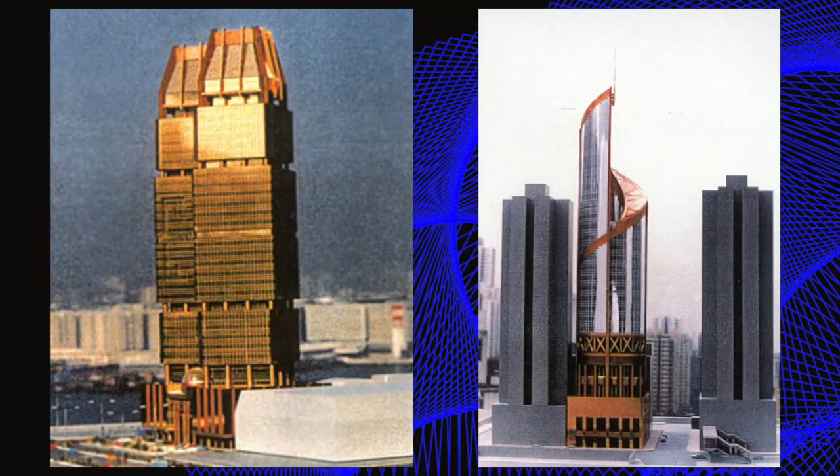Cosmont Design Group is an Australian-based company, integrating architectural design, urban planning, landscape design, interior design, and architectural construction supervision. It has completed many outstanding projects successfully over the course of its 35-year history in Australia, China, and other countries.

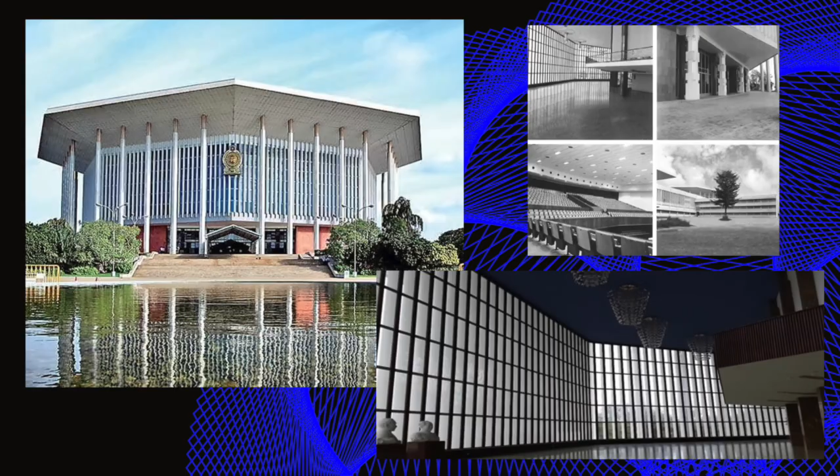The Bandaranaike Memorial International Conference Hall in Colombo, Sri Lanka, and the award-winning Islamabad Sports City in Pakistan, which used a mere 4 columns to support the vast span of the entire building, a revolutionary approach at the time.

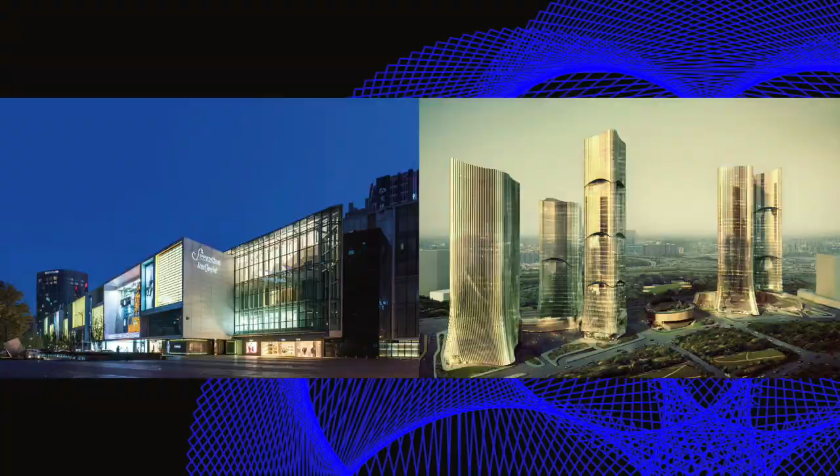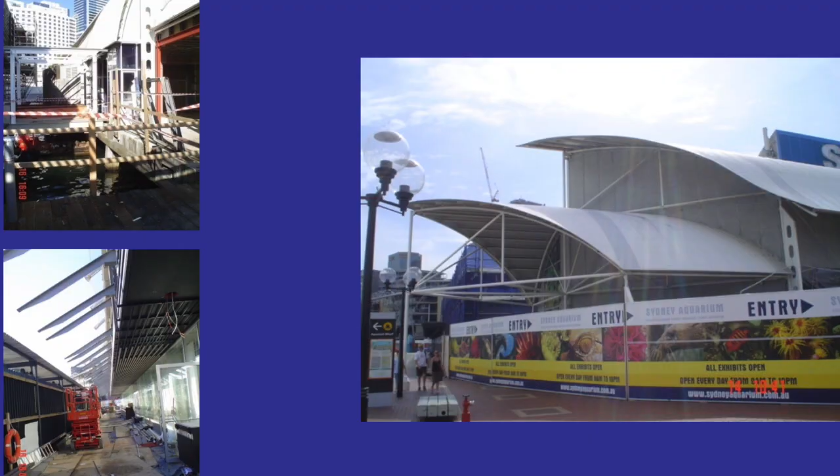The group's notable projects include designs for the Beach Plaza Shopping Centre in New York, the China Garden Hotel in Bangkok, Thailand, and participation in the design and supervision of the Sea Life Sydney Aquarium and Wildlife Sydney Zoo, alongside numerous residential projects.

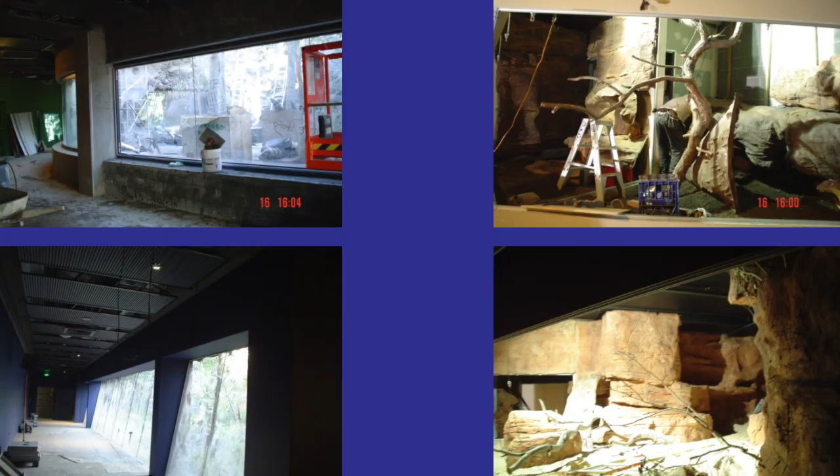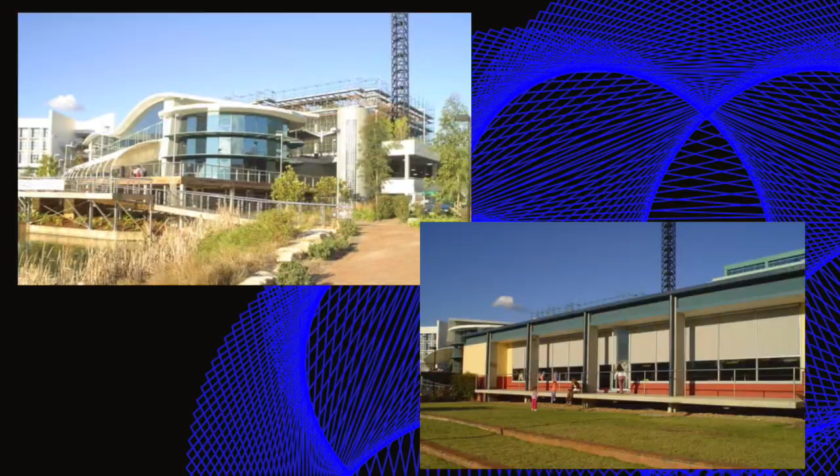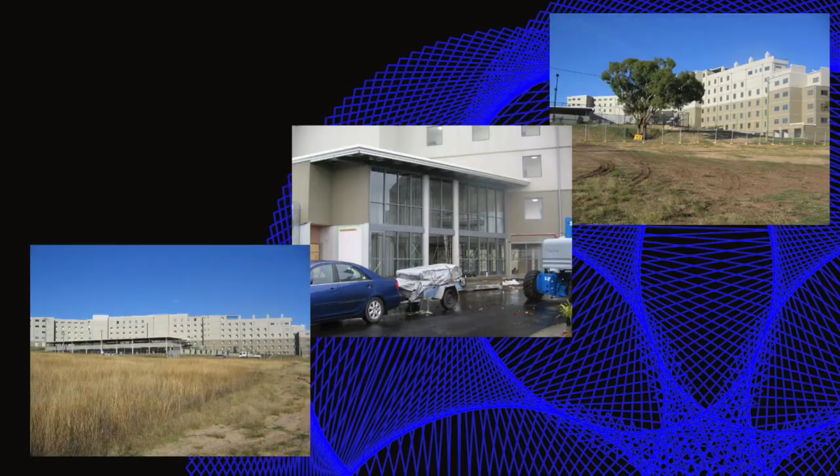In the present day, Cosmont Design Group continues on the path of developing an architectural style that merges Eastern and Western cultures for the Australian market. Their portfolio encompasses commercial, civil, and industrial buildings, all of which showcase their imaginative and innovative approach to architectural design.

Their attention to human scale and functional considerations is evident in their ability to integrate each building seamlessly into its environment.

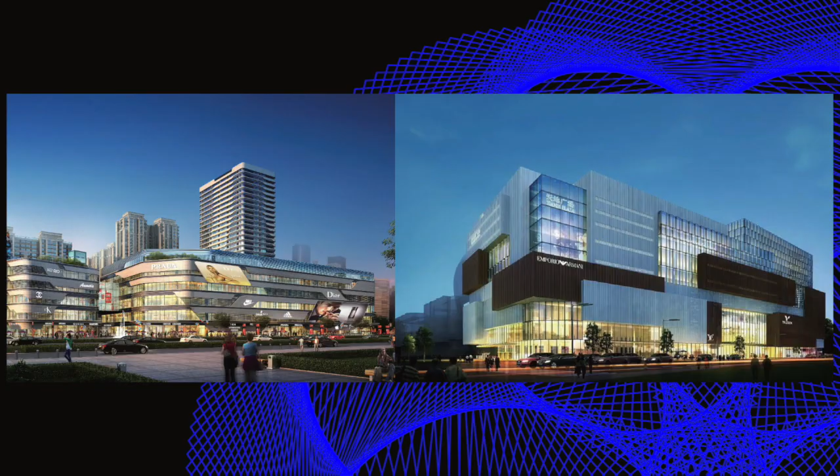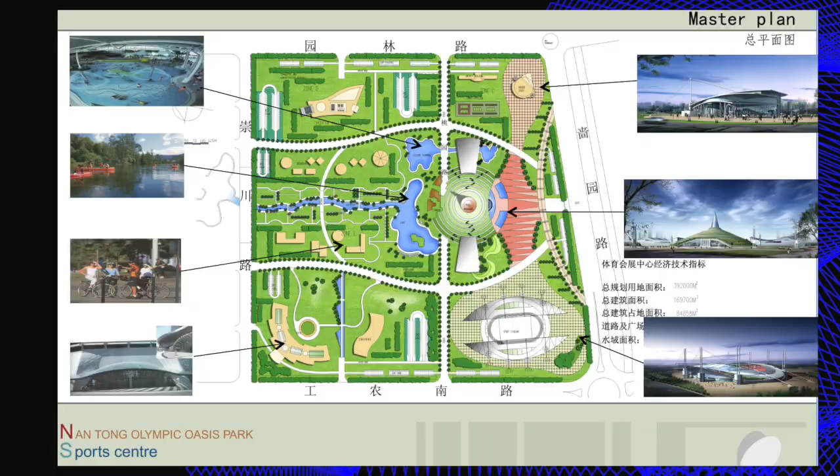Mr. B. Daishinjero, the director of Cosmont, has won many design competition awards, such as the China Theatre Design Competition, later published in the Chinese Architectural Journal, and the Best Preliminary Design for the Nantong Olympic Sports Center, which in 2004 was published by China Literature Publishing as one of the best architectural designs of that year.

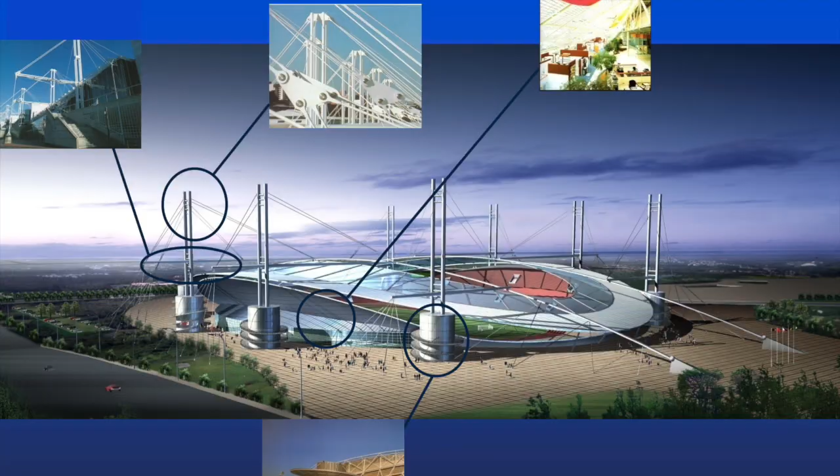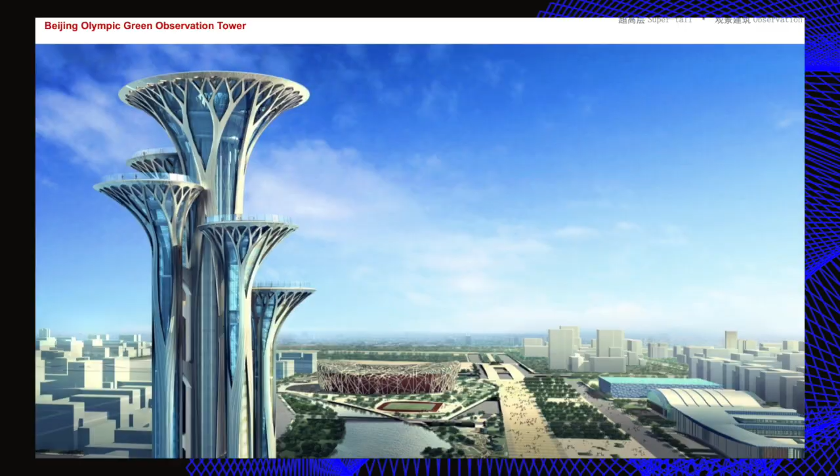Concurrently, he held leadership and collaborative roles in several commercial and civil construction undertakings in New Zealand and Australia. These included the conceptualization of a hotel development zone in northern Queensland, as well as numerous civil residential designs.

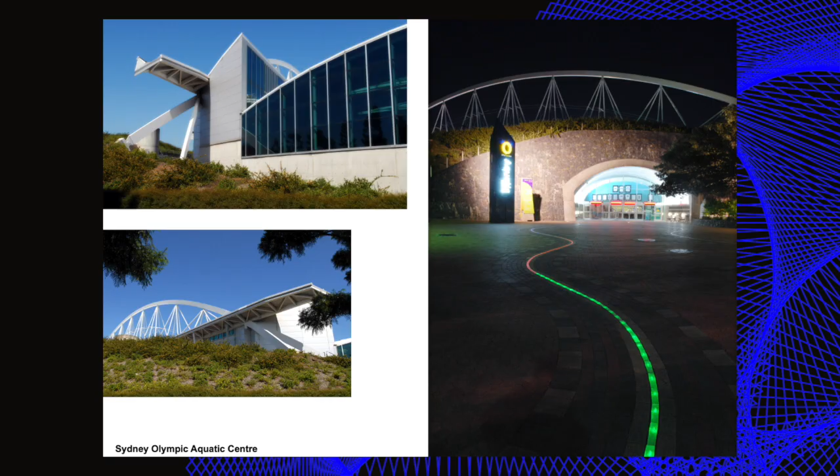Cosmont Modular Design Group also took part in the designs for the Sydney 2000 Olympic Games Aquatic Centre, as well as designs for some projects for the ABC.

Cosmont Design Group is also well versed in the area of construction management. The Fuzhou Yuanhong City project, comprising a commercial, office, and residential building complex of approximately 400,000 square meters, was funded by Salim Group, administered and partially supervised by Cosmont, and erected by the French SAE Engineering Company. Cosmont additionally designed some interior shop layouts for the project.

Cosmont Modular Design Group also designed and oversaw the building of several New South Wales government-funded swimming pools, the Volkswagen headquarters in Sydney, and one of the members also site supervised the interior construction of the Hilton Hotel.

Thus, Cosmont is skilled not only in Chinese design and construction, but also in Western architectural practices and project management.

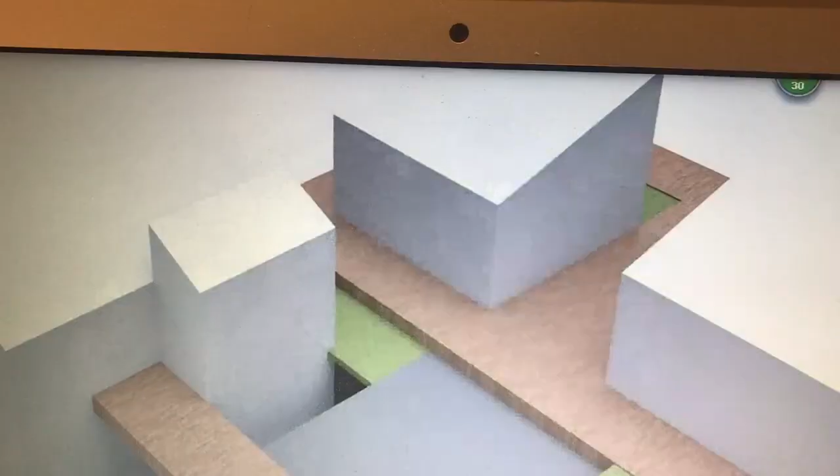In the early 1990s, BEAD began to incorporate the architectural design of the combined modular system in response to the construction industry's needs and to expedite the construction period, with the intention of replacing traditional construction methods.

BEAD's concepts were based on modular furniture design in his student days, revolving around the concept of using a sole base module to achieve infinite and flexible combinations.

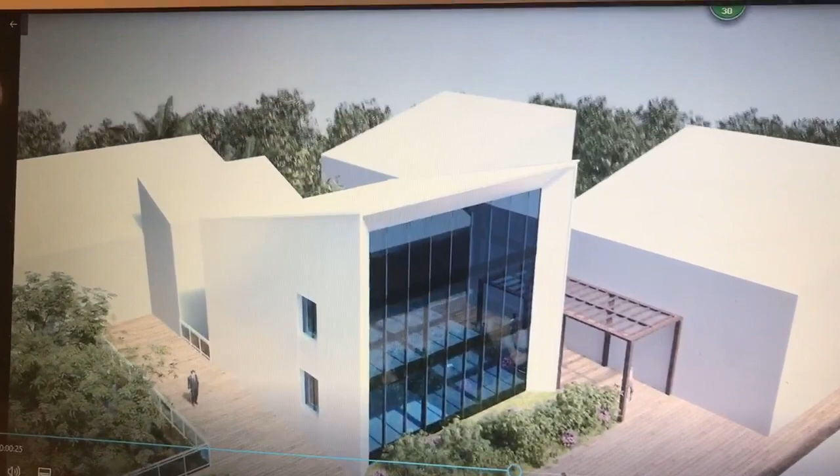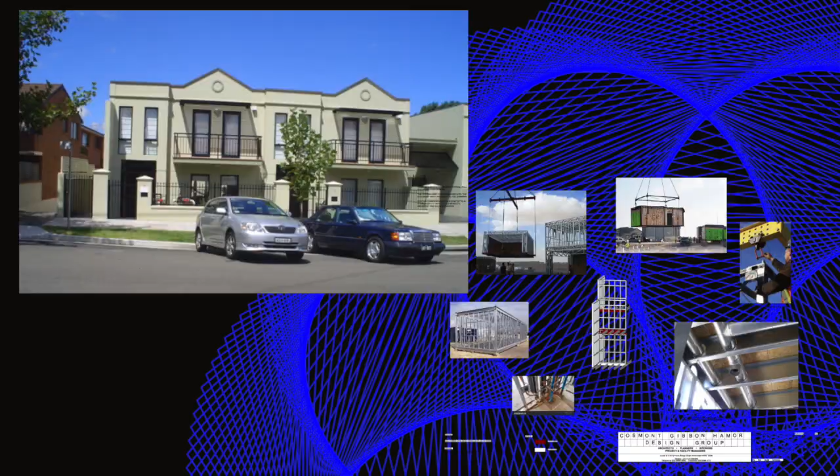In 2011, a collaboration between a New South Wales-based developer and Cosmont led to the construction of a 12-story residential building which employed modular design for its hundreds of kitchens and bathrooms, resulting in a significant reduction in construction time.

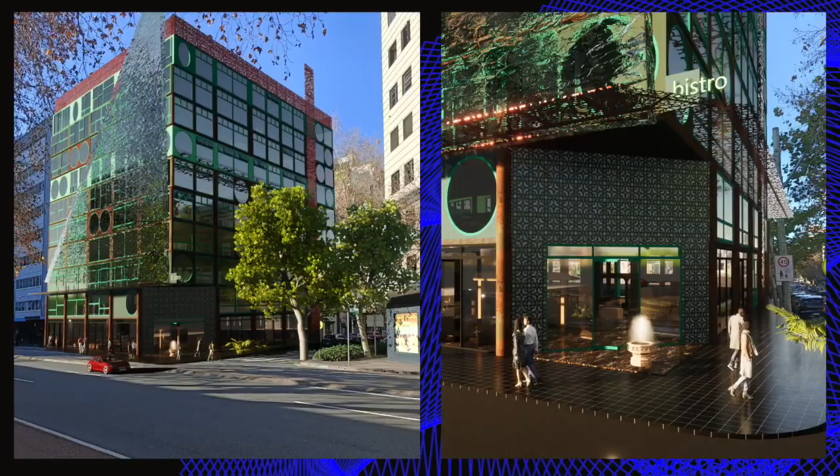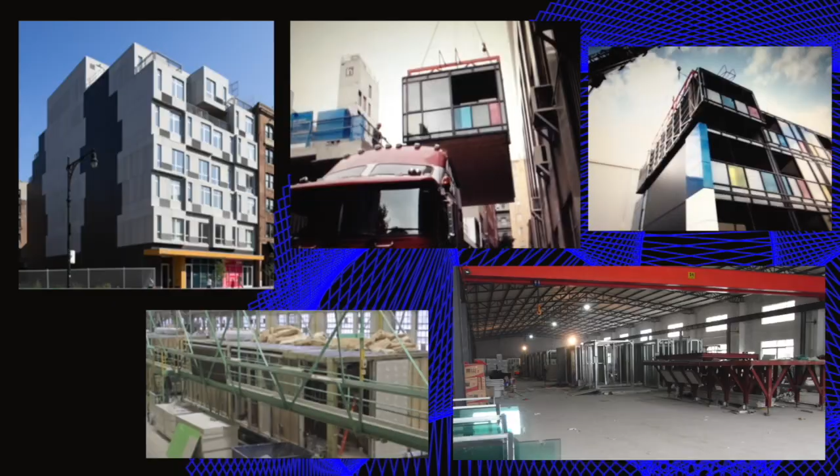In order to make modular buildings economically competitive, international cooperation is necessary. China, with its comprehensive production and processing capabilities, is uniquely positioned to swiftly produce modular building systems. This advantage, coupled with the complementary strengths of other nations, can result in excellent outcomes when China serves as a processing base.

Whilst modular design has been around in the Australian industry for several decades, it is only recently that excitement around the potential to mass manufacture buildings, and in particular homes, has increased.

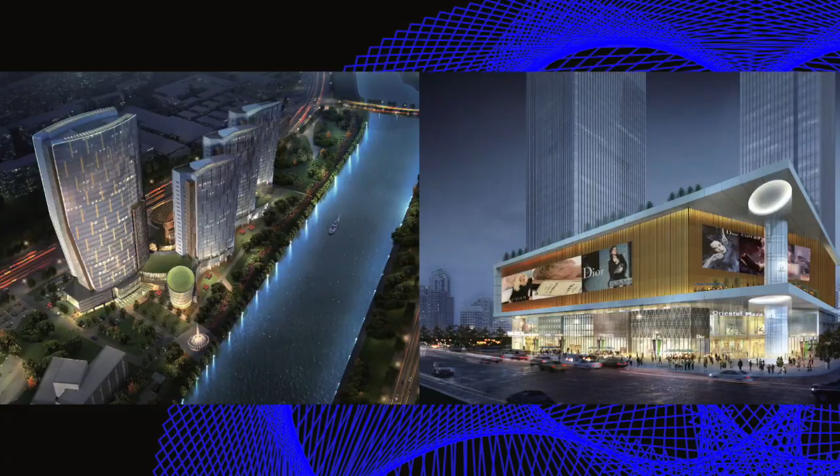Largely as the country's population has steadily grown, as the housing market has begun to bite, as the build-to-rent market has risen, and as the construction sector begins to feel the effects of a severe skills shortage.

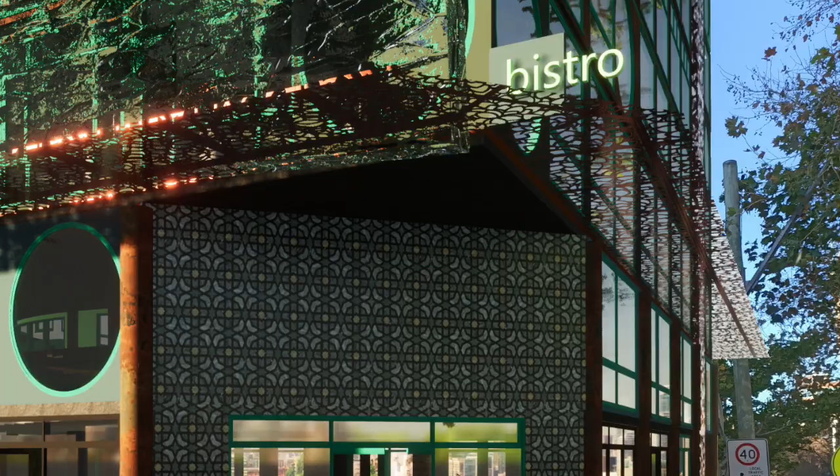In this video and on our website, we provide a glimpse of Cosmont's architectural designs through pictures of our works, showcasing our expertise. This proposed design for 240 Elizabeth Street in Surry Hills, Sydney, not only incorporates a modular system for the office building, but also integrates an automated car park system.

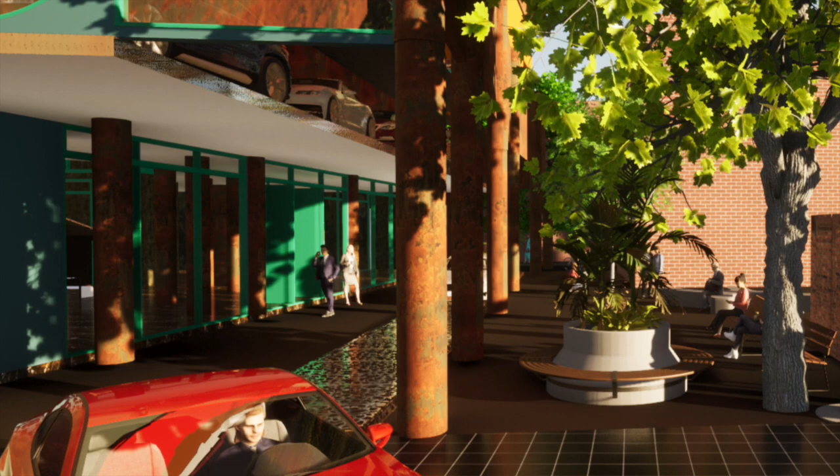This system can accommodate 80 vehicles within a narrow vertical space of 10 floors, integrated within the office building itself. This design is not only cost-saving, but avoids disrupting the complex system of underground pipelines, and addresses the challenges of parking in the bustling city centre where finding a parking spot can be difficult.

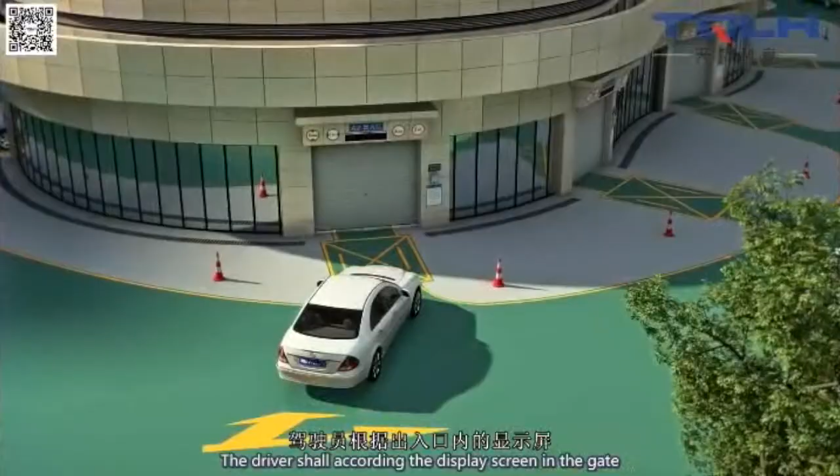Having driven their car to a designated space, the driver applies the brake and exits the car. The driver taps a card, and the driver can then depart whilst the vehicle will be automatically lifted and precisely delivered to the parking spot allocated by the computer.

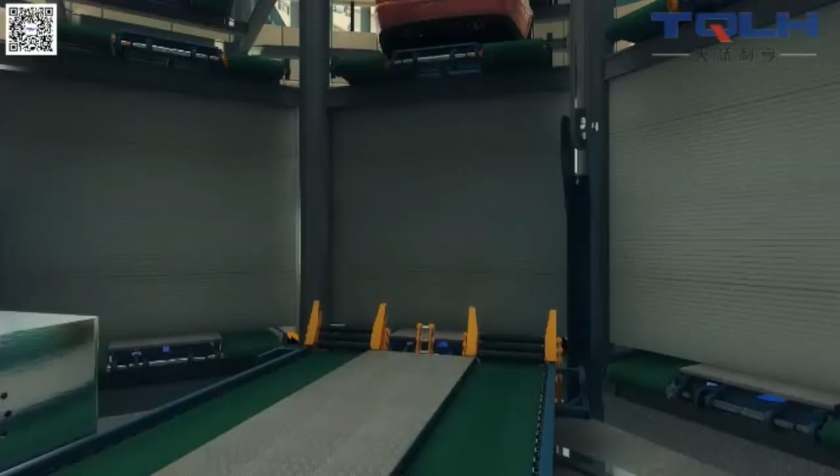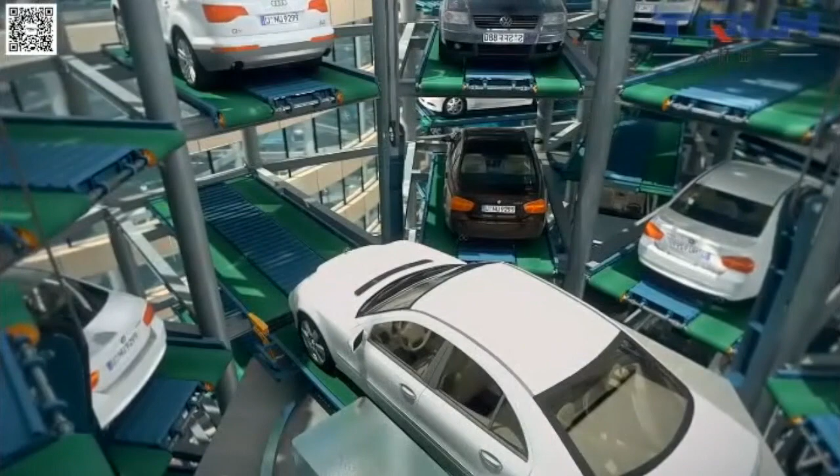When collecting a car, it is possible to do so by swiping the card reader at any gate, with a waiting time not exceeding 70 seconds. The vehicle conveying system will then lift and transport the car accurately from its stored parking space to the designated gate. This eliminates the need for the driver to remember or search for the car, thus saving time. Here is an illustrative example demonstrating how it works.

The auto car parking system can be configured in a circular, rectangular, or square shape, and can be applied to both above ground and underground car parking.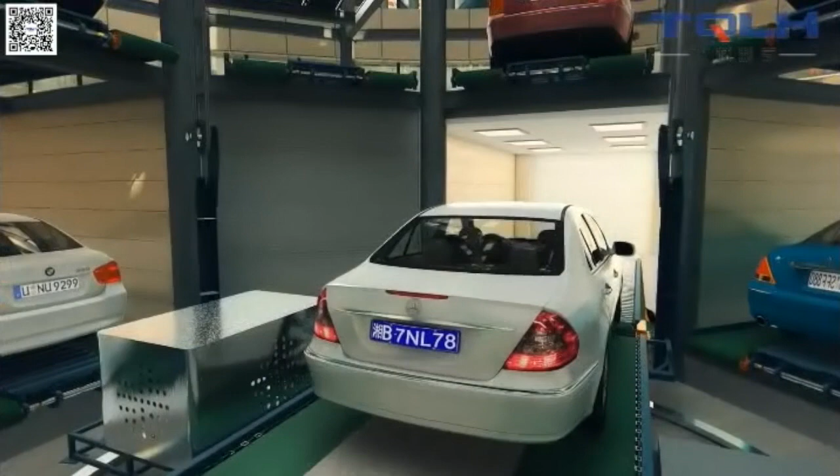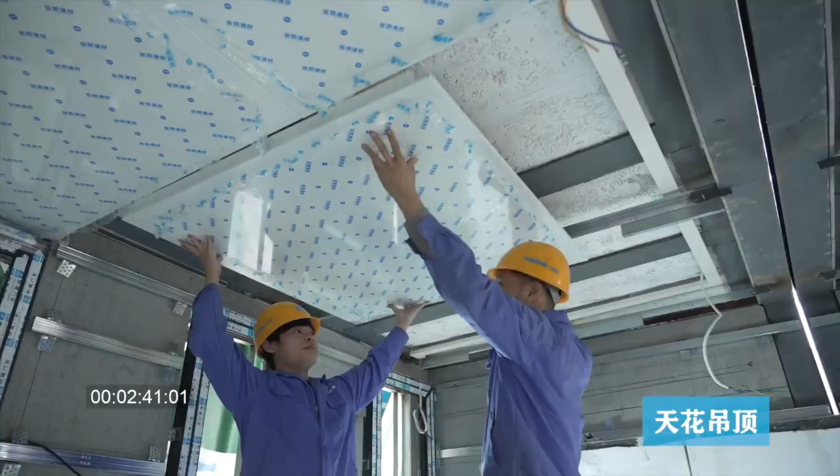Modular construction is a term used to describe when elements of a building, or even the building itself, may be prefabricated off-site, and then transported and assembled in the desired location. Traditional construction methods instead involve bringing raw materials to the site for processing, combination and assembly via competent tradespeople.

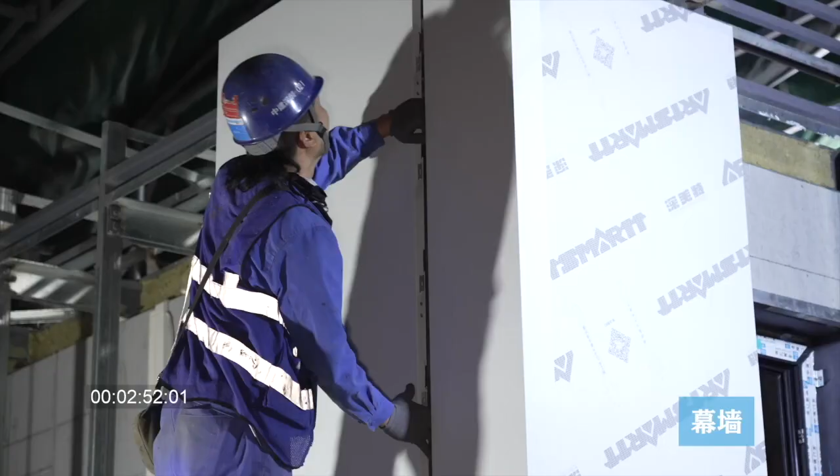The aim of modular construction is to increase the degree of prefabrication off-site, including framing, cladding, fittings, and finishes, and reduce on-site building activities, minimizing the chances of rework on-site. The optimum mix and degree of these objectives varies from project to project.

Where this concept is maximized to deliver structurally complete building units to site, it is described as volumetric or three-dimensional modular construction. Other forms employing a lesser degree of completeness, but which may be efficient options, are variously described as flat pack, or panelized elements, or prefabricated components.

Modular construction concepts are not solely limited to residential building works. Any method where on-site work is minimized and prefabrication is maximized is considered modular construction.

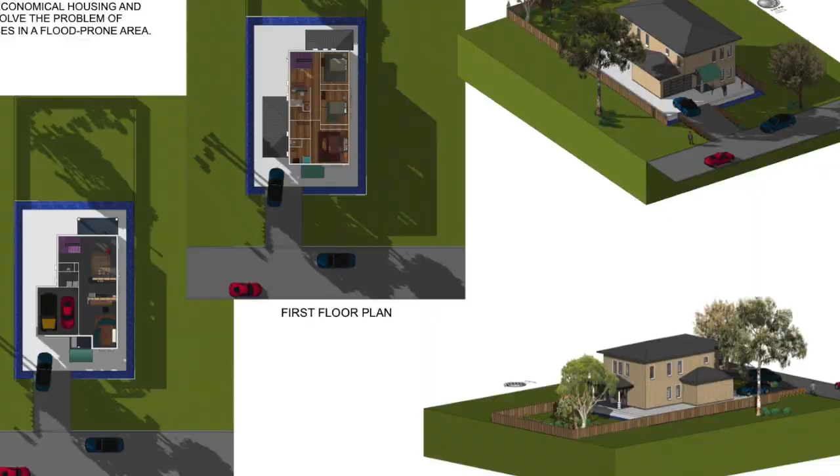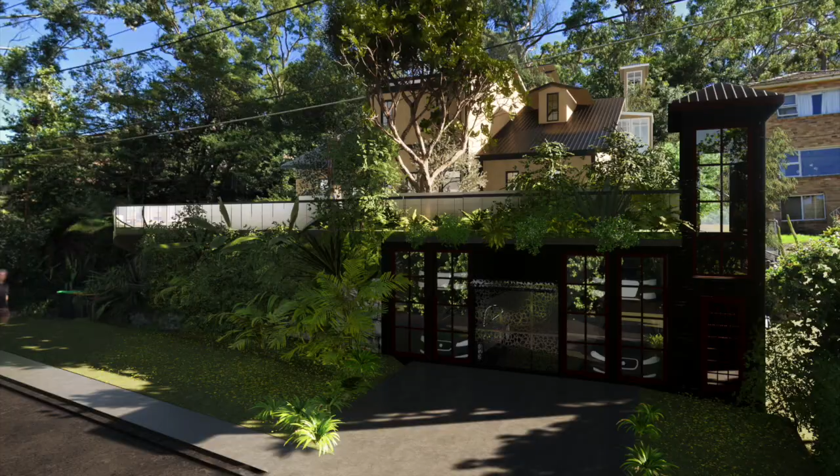Completion of 24 dwellings can be accomplished in a very short time frame. Here we see the same method used in a project in Chatswood, Sydney. The modular system can also provide granny flats for the demanding Australian market.

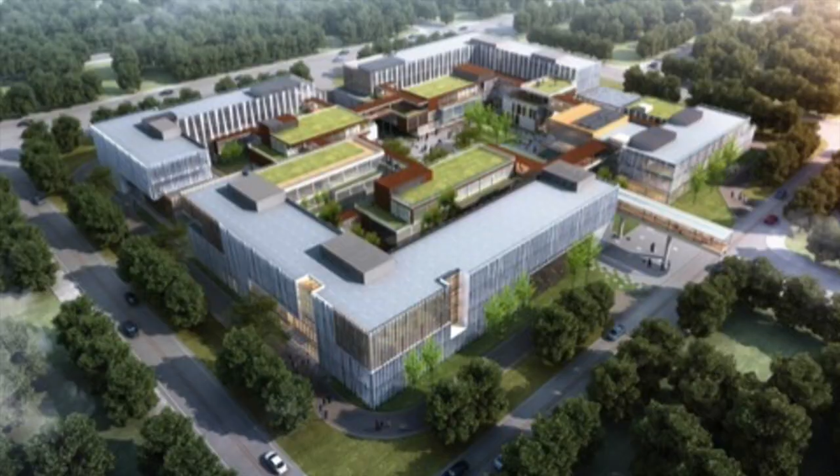Cosmodular's unique autolock system allows modules to be used either to construct permanent buildings, or to be installed as temporary structures. The modules can be added or removed according to functional requirements.

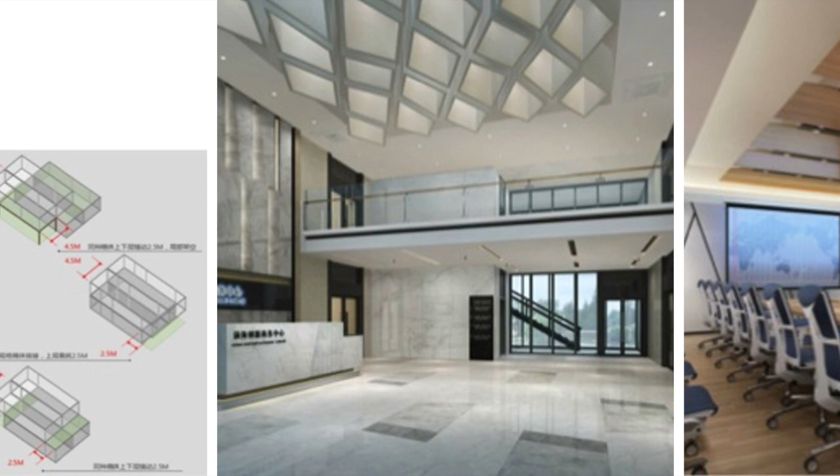In relation to hospitals, for example, those built using the Cosmodular system can provide the full range of services during normal times, but during times of high demand when a quick response is required, additional modules can be added to fulfill specific needs, such as isolation units, operating theaters, clinics or wards.

When no longer required, these modules can be removed and used elsewhere. A cost-saving measure that not only saves environmental resources, but also saves time, as the modules are already constructed and ready to use.

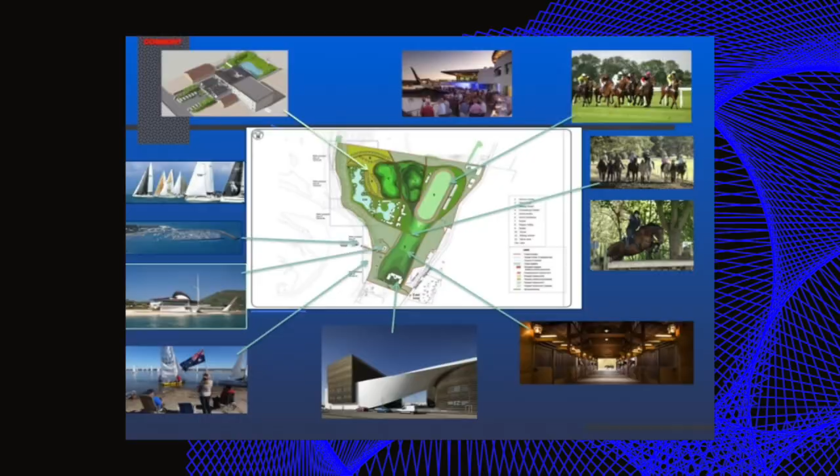The modular office complex is showcased here, from its design and construction to its shipping and final installation at the site. Here it is used to provide a holiday resort in Tasmania.

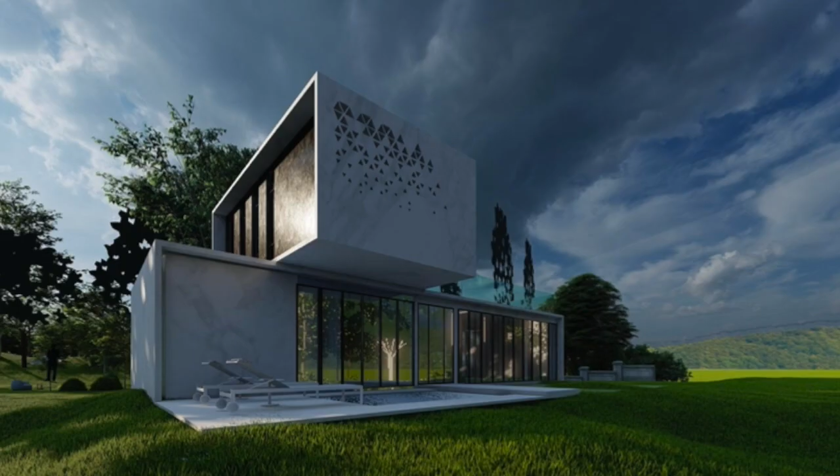Cosmont Design Group and China Construction Shenzhen Decoration Company have formed a joint venture to manufacture and provide modular building products. The prefabricated modular building version 2 system is a low-carbon, eco-friendly, intelligent, steel-framed modular construction product.

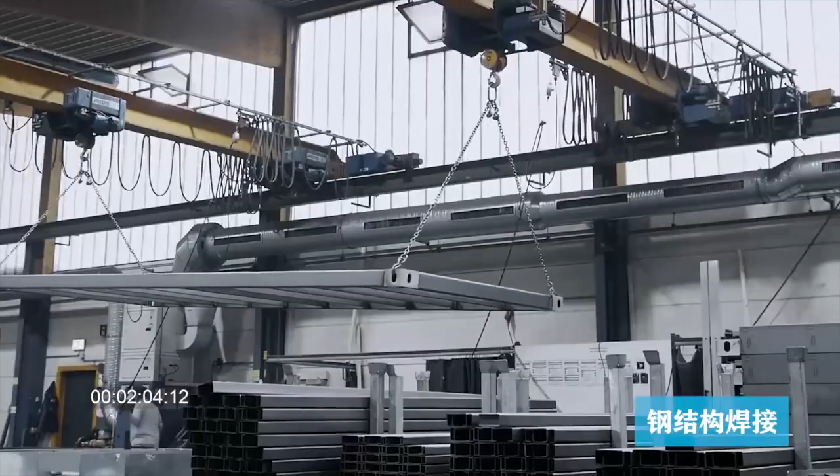Our team employs an innovative design concept that leverages BIM technology to plan the function and overall design of the building. This approach effectively overcomes the area limitations of the module and extends the indoor and outdoor architectural space through innovative design.

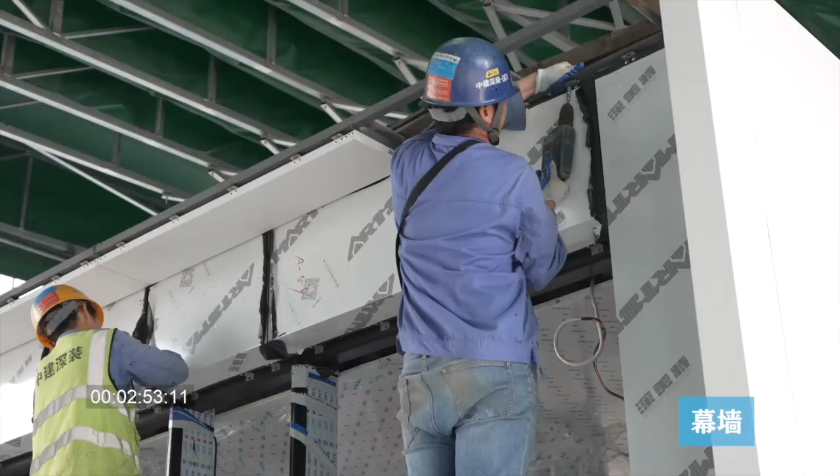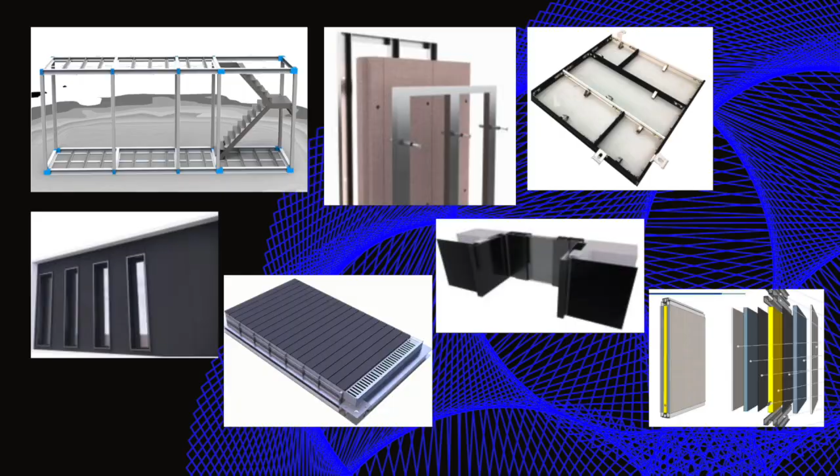What will the architecture of the future look like? Through a combination of green building and adaptable, prefabricated design, we will bring architecture back to its origin and serve the living experience. Our team will continue to explore the application and practice of prefabricated buildings, promote intelligent digital integration in the design process,

and seek to create a healthy, safe, intelligent and comfortable world.

Cosmont Design Group in association with CADG was one of the first companies to establish its presence in the global building construction market, following China's open door policy.

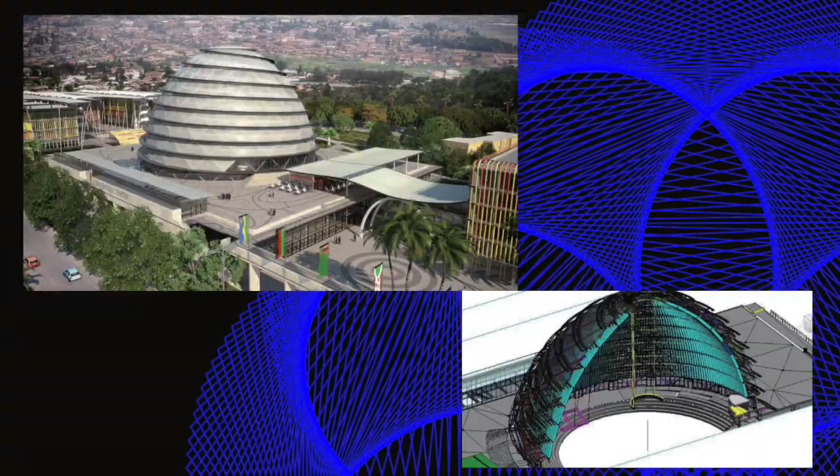It has a staff of over 2,100, including 2 academicians of the Chinese Academy of Engineering, 5 national design masters, 61 experts who receive government subsidies, around 400 nationally registered professionals, and over 600 senior designers and researchers. More than 92% of the staff are technical professionals.

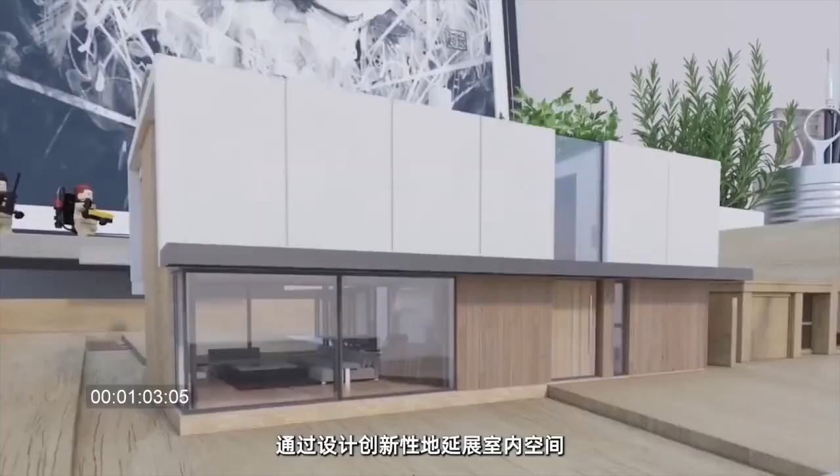Cosmont plus CADG's extensive business scope covers project consultation, management and supervision, urban and town planning, design and construction, environmental and energy-saving assessments, building intelligence consultation, traditional architecture, interior and landscape design, historical cultural heritage conservation planning and consultation, and research works concerning housing industry technologies, building material and equipment, and BIM technology research.

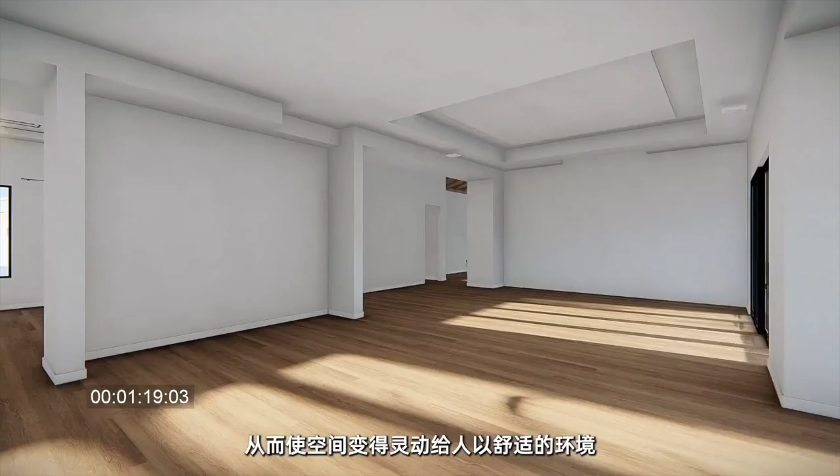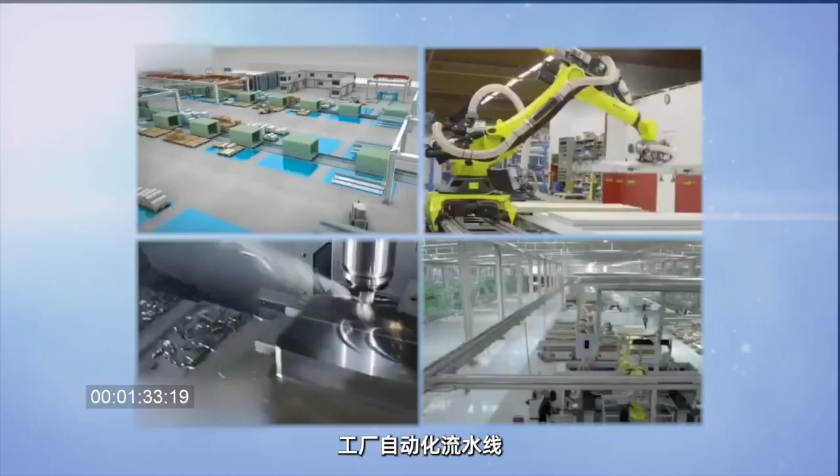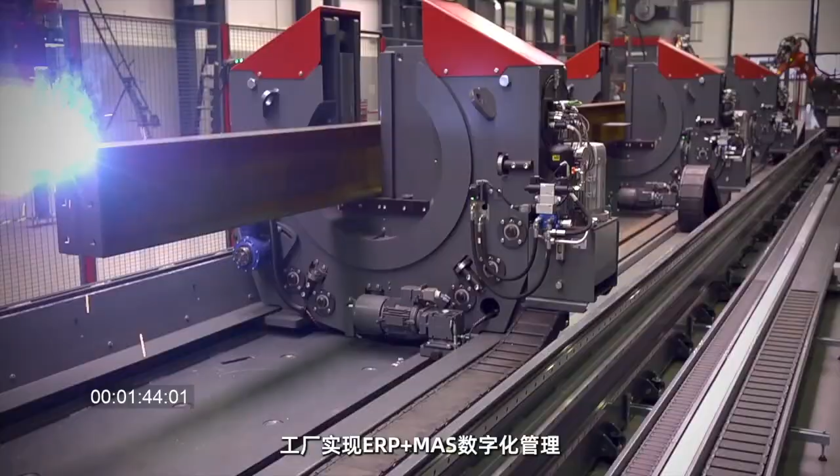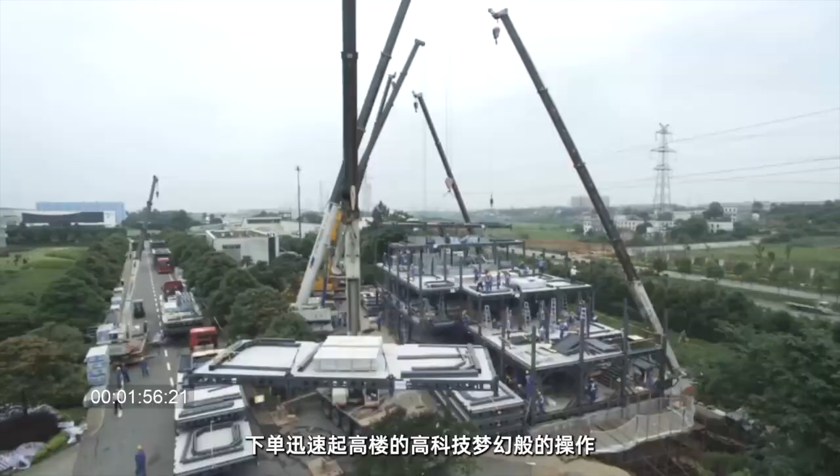Cosmont plus CADG has overseen or accomplished a series of noteworthy national-level programs and projects focused on scientific advancement and technological research. Since 1986, Cosmont plus CADG has been awarded over 160 scientific research prizes, ranging from national to provincial and ministerial levels. Additionally, they have contributed to over 70 national and local standards and codes, and undertaken over 1,000 5-year plan projects. Cosmont plus CADG have further established a project-oriented managing system, resulting in multiple design project departments and studios headed by prominent individuals.

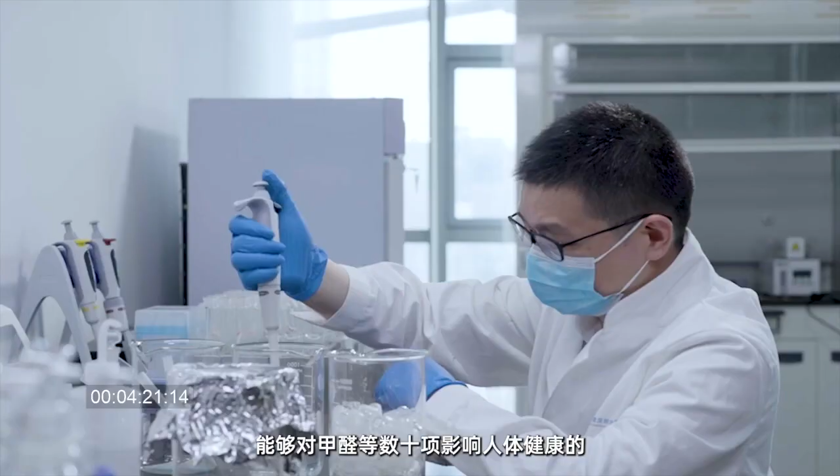Additionally, we have established a series of sub-organizations, such as the Architectural History Research Institute, the Design Verification and Consultation Institute, the Intelligent Engineering Center, the International Design Consultation Institute, the Residential Architecture Department, the Human Environment Department, the United Architecture Design and Research Center, the BIM Design and Research Center, and the Green Design and Research Center.

Our team has successfully navigated technical challenges and partnered with expert consultants and industry organizations to develop innovative prefabricated modules. This approach ensures that building spaces can be customized to meet client needs more effectively.

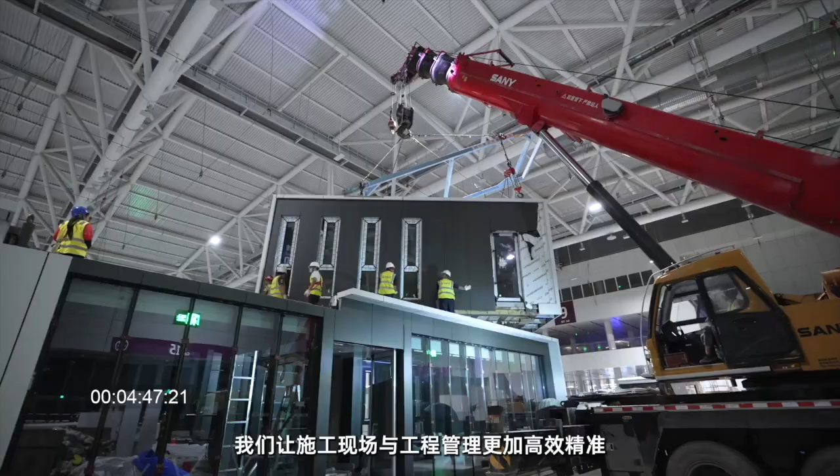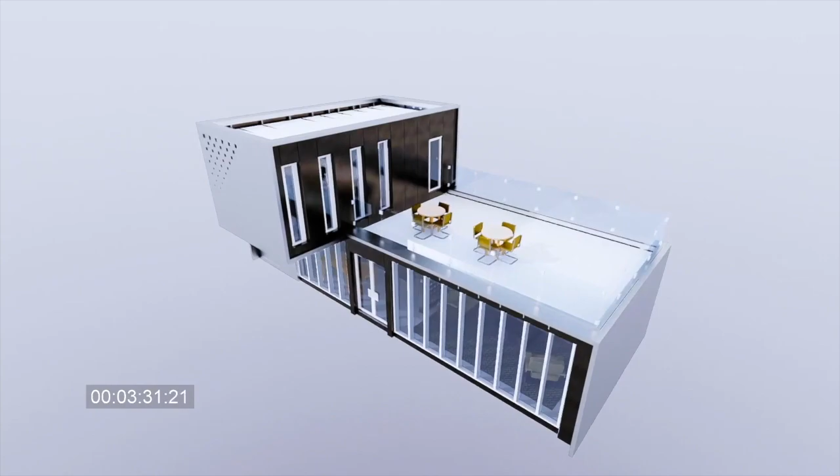Our modules rely on industry-leading ultra-high precision assembly technology and a vertical cone socket positioning system to support their 8 beams and 4 columns, while ensuring accuracy control within 2 mm. Our method improves construction site and project management efficiency and accuracy, because all stages of production, processing, and assembly take place in the factory. The largest single box is 12 meters long, 2.6 meters wide, 3.3 meters high, and weighs 15 tons. The installation accuracy can achieve millimeter precision.

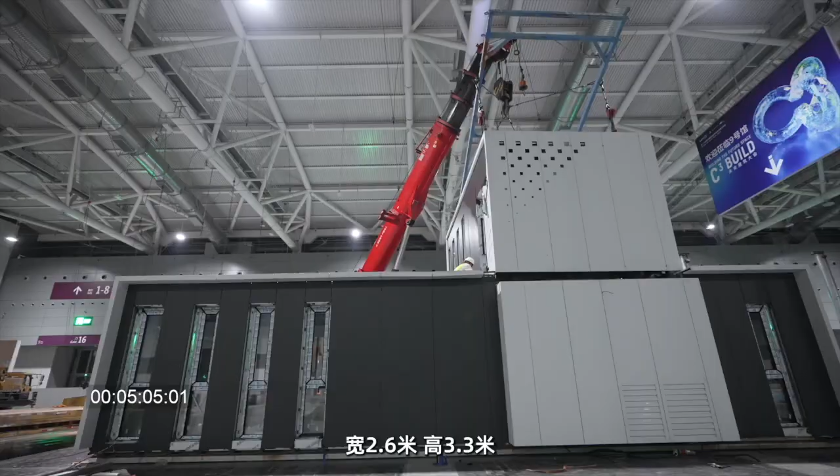The assembly and hoisting of all modules can be realized within 2 days. The accuracy can be controlled within plus or minus 2 millimeters, and 95% of the building can be assembled in the factory, which greatly reduces the risk of outdoor aerial work for workers. Additionally, revolutionary changes in structural connectors extend the integrity of indoor and outdoor buildings and improve efficiency in installation. The modules can also be reused, which greatly reduces the waste of natural resources, and can also provide swift, assembled buildings in the case of emergency.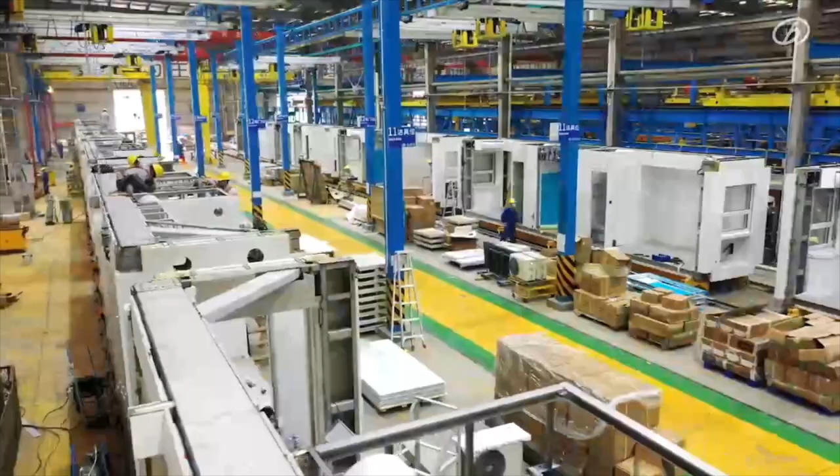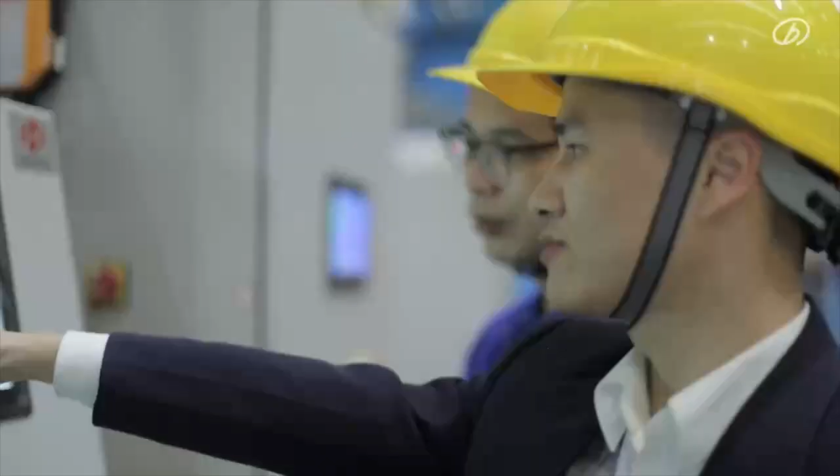As an additional development, a joint venture has been formed to produce a modular system made of stainless steel, enabling the building of 10 stories in 1 day. Here, economies of scale can be achieved through production lines that embrace automation and use standardized elements.

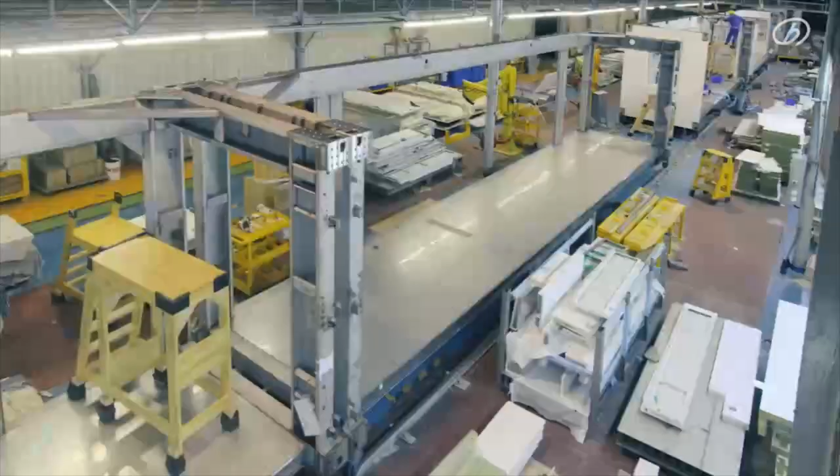By having teams focused on producing specific aspects for building components repeatedly under the same conditions, productivity can be increased, and quality can be substantially improved, reducing the number of defects in the completed building.

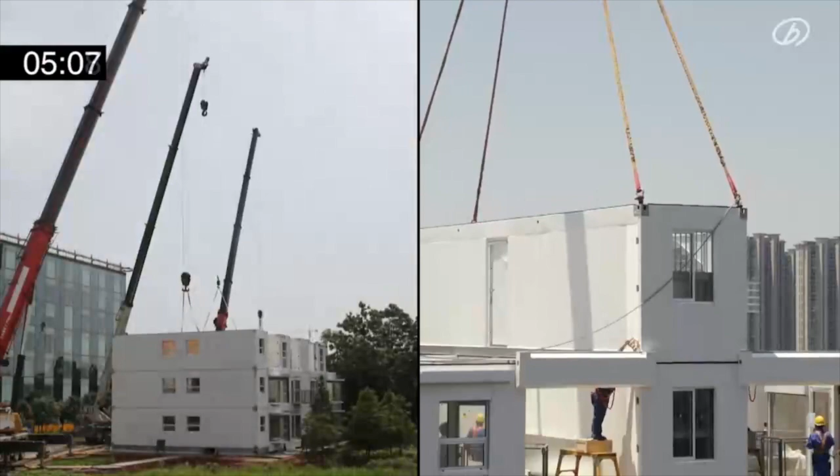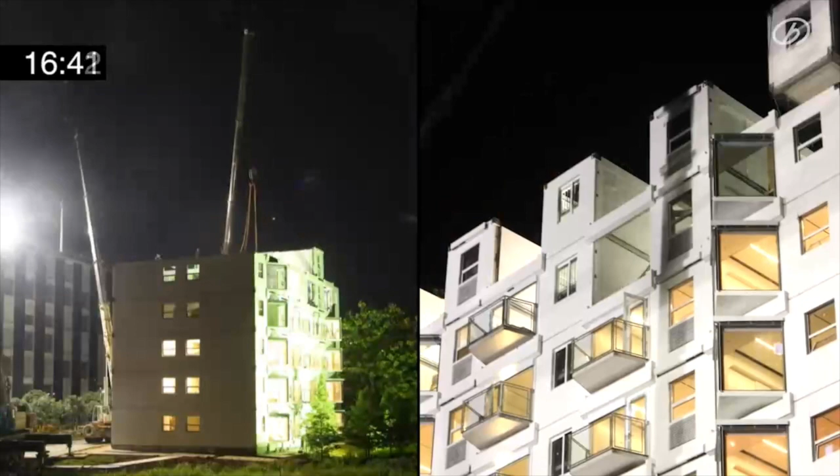There is also the benefit of reducing time spent on sites, where the costs of providing temporary power, accommodation and facilities can quickly add up, and where the potential for disruption is higher. While some of these time and cost savings are, of course, offset or occasionally even cancelled out by other elements of the process, the benefits of moving away from the site environment are still compelling.

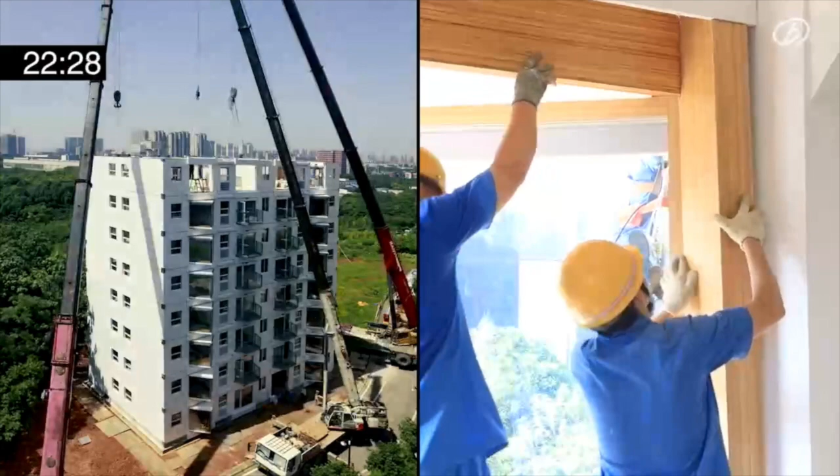Quite aside from the advantages in delivery, off-site approaches appear to provide attractive solutions to a number of the challenges currently facing our wider society. These techniques could allow for housing to be delivered more rapidly in high-density urban areas, helping to tackle the housing crises currently facing many developed nations, such as Australia. They could also enable the fast construction of infrastructure projects, enabling new and emerging communities to grow.

An underlying contributor to the housing crisis currently facing Australia is a lack of skilled operatives entering the construction workforce. Off-site approaches could help address that, by reducing the demand for labor capable of constructing homes with traditional methods.

The extent to which work can be taken away from construction sites varies significantly. At one end of the spectrum, volumetric solutions create entire closed spaces in a factory and then deliver those to site for installation or assembly with other similar elements. Some buildings may incorporate a degree of volumetric construction in the form of bathroom pods or plant spaces.

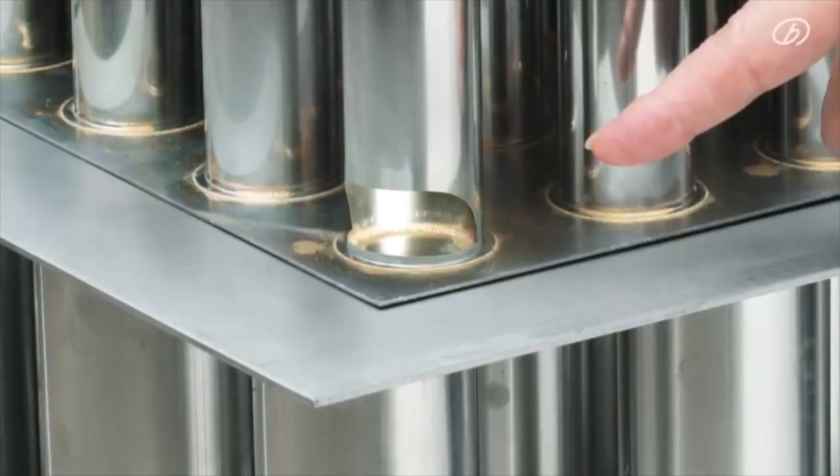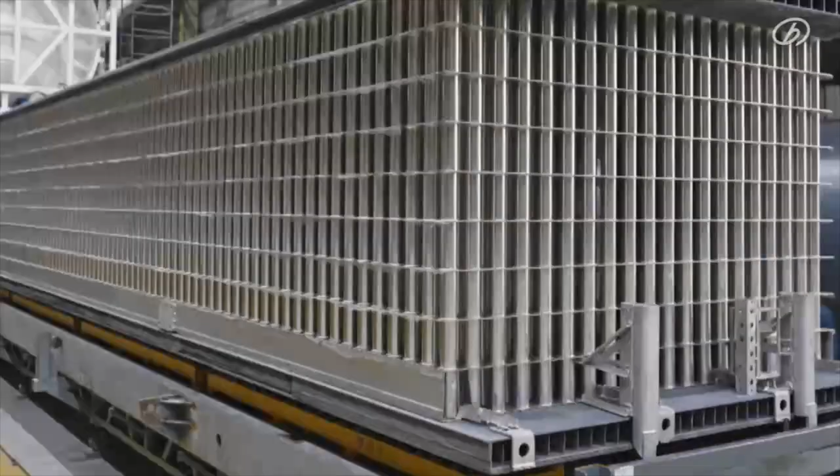Conversely, non-volumetric systems are large elements of a building or structure that are prefabricated before being brought to site. Panelized systems such as cross-laminated timber or structurally insulated panel systems fall into this category, as do unitized facades and large stainless steel elements. Finally, component-based approaches take the concept to a far more granular level, effectively creating a kit of parts and drawing on a series of predetermined items that can be produced, delivered to site, installed, operated and maintained with ease.

Cosmont plus CADG's commitment lies in upholding the joint company's values of client loyalty, contribution to society, and environmental innovation, whilst adhering to its guiding principle of scientific management, dedicated services, meticulous design, and exceptional quality.

Of late, Cosmont plus CADG have been successful in securing an increasing number of foreign aid projects, and it continues to foster innovation-driven growth in this area. Now and in the future, by utilizing its comprehensive advantages in design, research, human resources and technology, Cosmont plus CADG will actively broaden its market and collaborate with national and international partners to provide highly efficient and top-quality services to all clients.